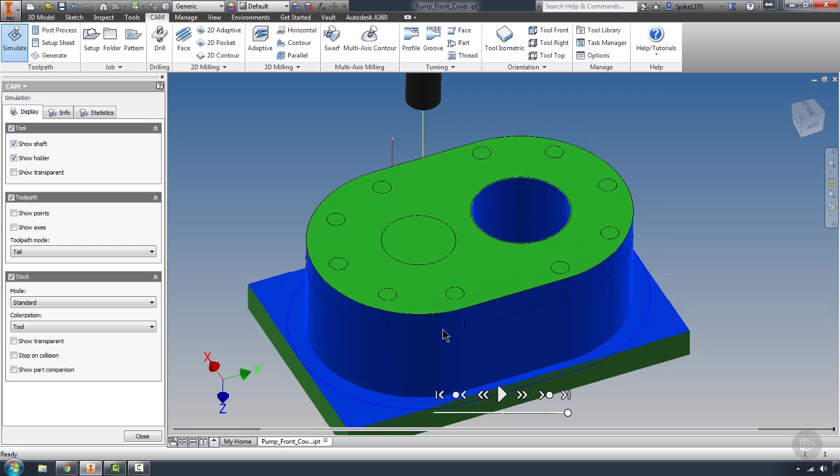So I know that these three toolpaths are checking out. So I want to continue to rough this part out. I'm going to need to rough this particular bore out still. So I'm going to continue using this create a derived operation, 2D milling. And instead of contour to rough that out, I'm going to go ahead and use a boring operation.

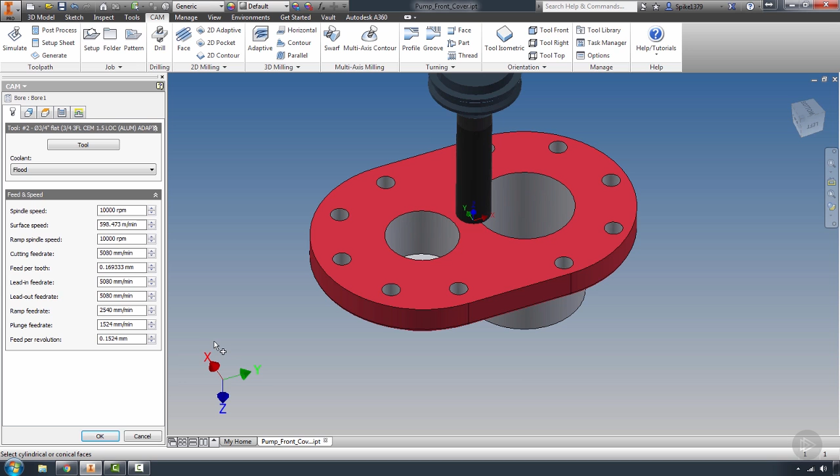Now this is a helix bore operation, so it's asking me for cylindrical geometry. Now the cool thing about HSM is that it's picking up the entire cylinder, and I have the option to change the height. Again, this is going to the model bottom that was selected to it, but I have the option to select the whole bottom. Now that automatically selects the end geometry of any cylindrical geometric shape. So therefore I am automatically moving to that location, but it's 0.05 millimeters past, so I'm going to change that to 0. Go into my passes tab and look at my technology for a moment.

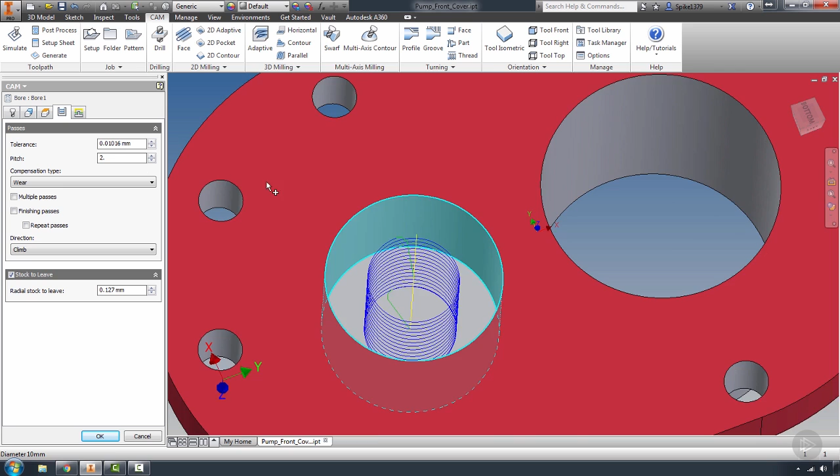You can see things have changed. I have the ability to use multiple passes if I need to. In this case, this hole is big enough or small enough for the cutter to where I don't need to do that. I have my pitch control, important to know, so I can change this to be 1 millimeter, or even in this case for aluminum, I can go much bigger than that. I control the value of my helix. And then I can add a finish pass.

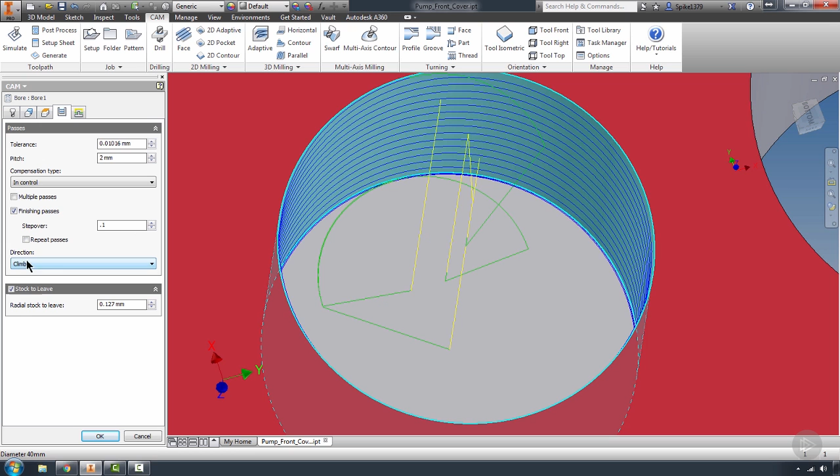Now the finish pass is going to be a circular pass with a lead in, lead out, to engage cutter compensation, and allow me to use G41, G42 again. This is the finish allowance of the actual step over the finish. We'll go 0.1 millimeters for that. And we'll have 0 stock to leave because we're going to actually machine that bore all the way down. That's a clearance bore, so this should actually be the perfect toolpath for it.

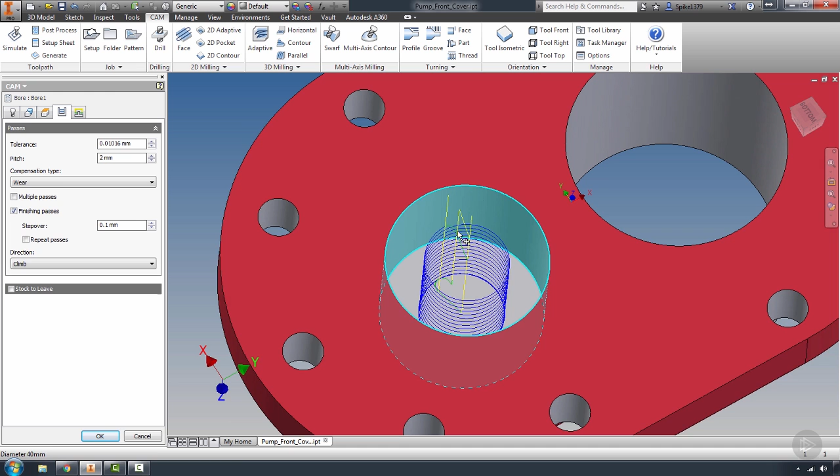And just like that, I've got the proper toolpath. Now you'll see there's something wrong with it. I may have actually accidentally selected the wrong compensation value. And there we go. We'll switch that over, and you'll see that now that's accurately represented to the tool radius. Hit OK. That bore is completed.

And now I need to do just a finish toolpath within this cylinder. Now, I would normally, in most CAM systems, use a contour to come in and just finish this bore. But what I would like to do is actually right-click, create a derived operation, a 2D milling operation, and use a circular cutting operation. Now I'm going to come over here to the panel real quick and show you down in the drop down menu where this toolpath is, and as I hover over it you'll see that this is for circular milling.

Now the important thing to recognize with this is it's set up in the post processor to actually create full or separated arcs based upon your machine tool's individual needs in the post processor. This is going to be different from what your machine output's going to do with contours. So it's important to understand that contour shapes are good for just about everything. But when you want a true circle and to create true circular G-code, use a circular toolpath.

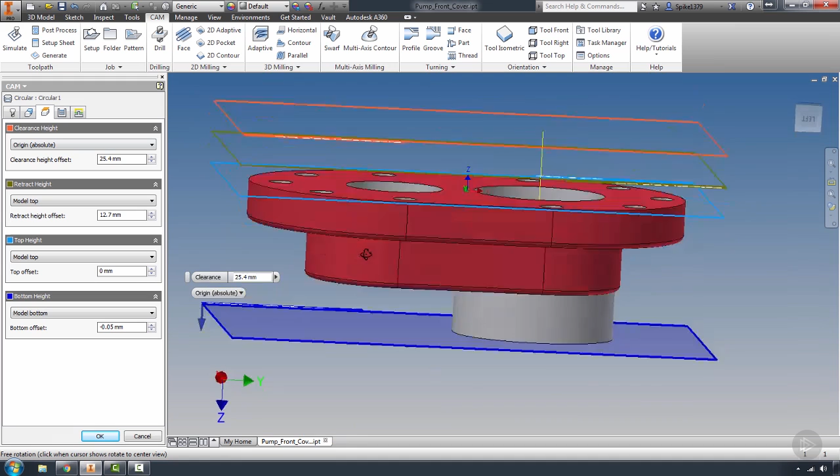So we're in our circular toolpath now. I've used a derived operation, so I'm using the same tool. I'm going to select the cylindrical geometry. And you'll see that by default I have this set up for roughing strategy. My heights are going to be controlled by the derived toolpath capability off of that contour. Inside of my technology and my passes tab is where I'm going to change the multiple depths. So I'm going to turn that off. I'm going to just have the individual lead in, lead out, the individual single toolpath at the very bottom.

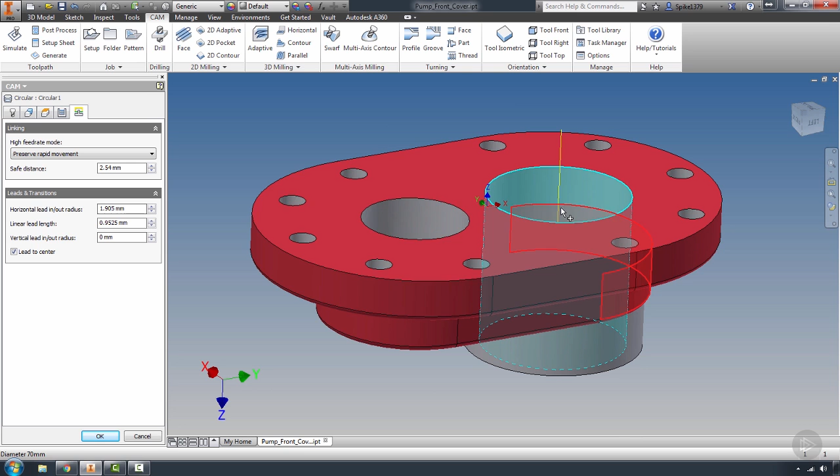Now in my linking toolpath, I always have lead in, lead out to center selected. This is a personal preference, as I like to see in the G-code before it goes into the hole that it has reached the actual center of the hole before creating the contour. So if I turn this off, you'll see that it will lead in, lead out close to the wall and save some time. For me, when I'm machining most things as a prototype, I like to be able to look up at that position and know that I'm relative from my coordinate system to the starting point of the center of the hole. It's just an extra added check for me. I'm going to hit OK. That's going to finish that bore.

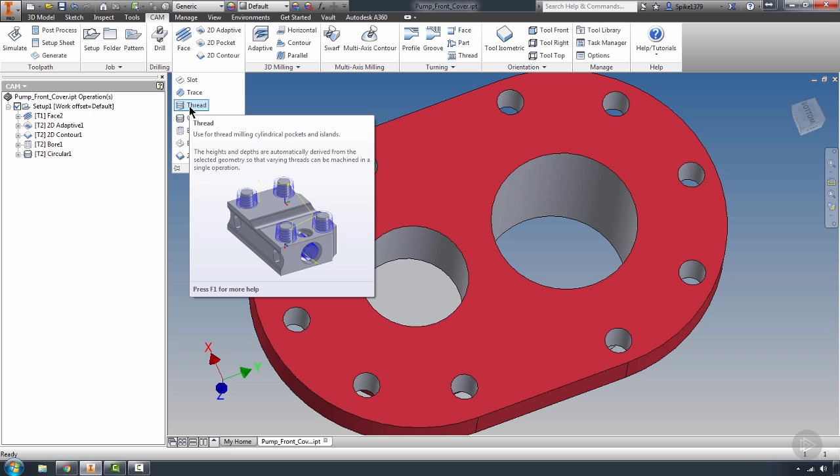Now this is a thread. So while I've finished the ID profile of that thread, let's go ahead and look at our next toolpath, which is actually going to be a thread toolpath. So in threading, this is a thread mill toolpath, and it can do both internal and external bores. I'm going to left click on it.

Now we have the toolpath dialog pop up again, and we're going to go ahead and go into a library. Now I'm going to look up a thread mill. So I'm going to go by toolpath type, by tool type. I'm going to left click on thread mill. So I don't have any libraries with any thread mills defined, so I'm going to actually have to make a

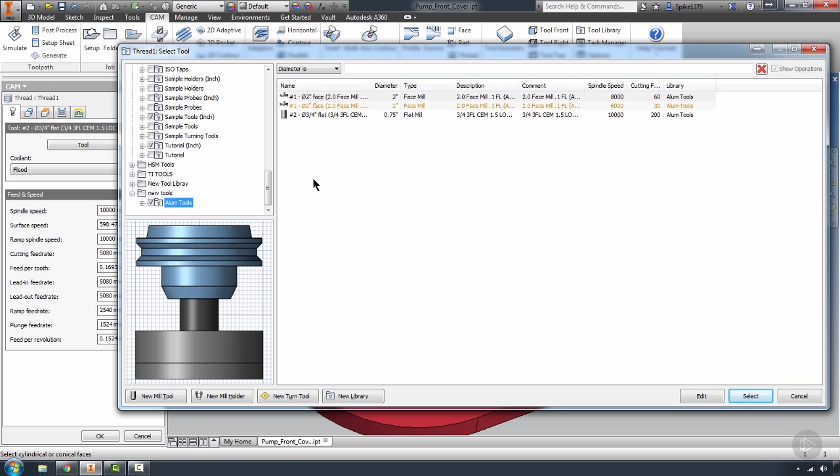new toolpath. So I'm going to hover over my toolpath library in this instance. I'm going to make it directly in the library. Go into a new milling toolpath, left click on my cutter type within the general tab, and you'll notice that there is no thread mill option. What I'm actually going to use is a form mill.

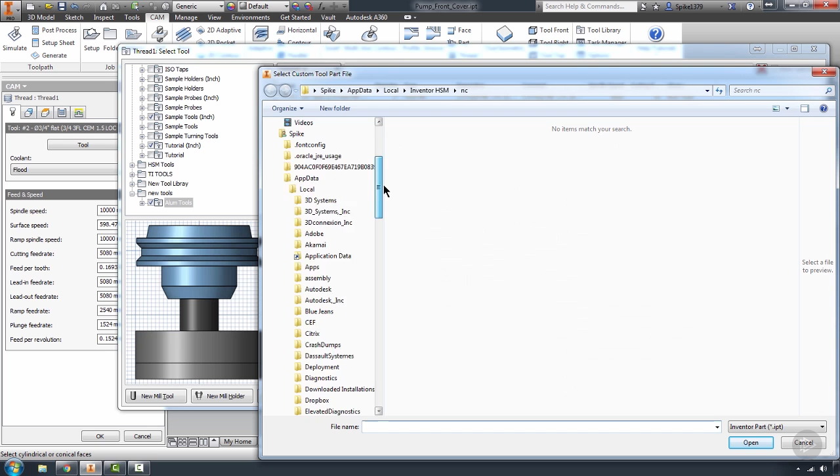Now I already have the geometry of my particular thread mill that I like to use created externally. So I'm going to import that geometry. That's simply navigating to wherever that solid file is created. And I'm just going to simply left click on that solid, and it's going to open and import that solid profile. So now I have my 60-degree single point thread mill cutter defined.

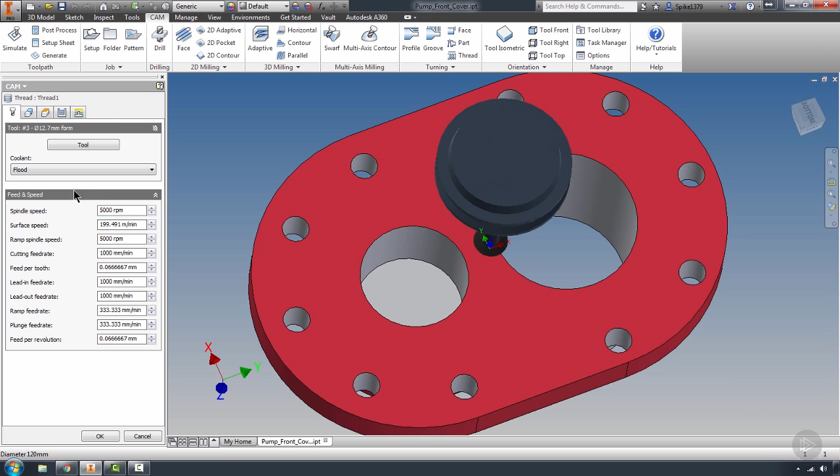I'm going to select OK. Again, I could go through and name it. In this case, I'm going to skip that in the savings of time here. I'm going to select that tool. You'll see graphically I have a representation of that tool here. Speeds and feeds automatically populated. I'm not going to worry about that for now. And this is where I select the geometry next, which is going to be that face.

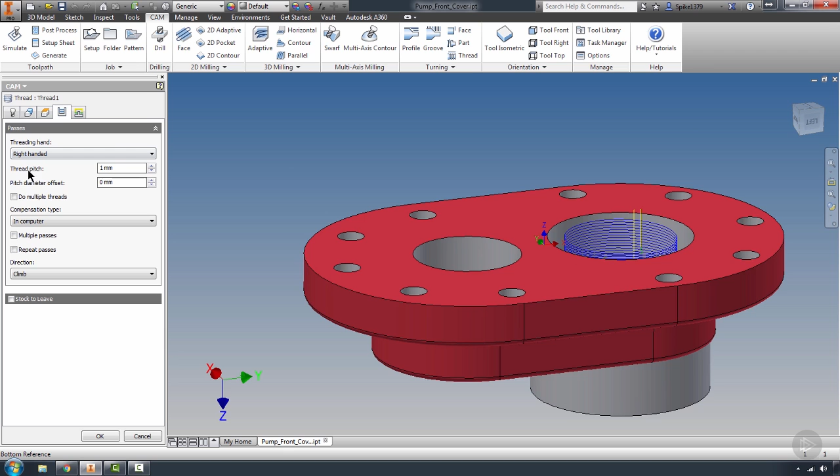Now whatever the default settings are set up to is what it's going to automatically go to here. So I'm going to go to my heights tab. Everything should be set from hole top and hole bottom, which is going to pick up that cylindrical geometry there again. And in my passes tab, I'm going to control what my pitch is. Now in this case, this is an M56 by 2mm thread. So we're going to change our pitch to 2 millimeters.

The diameter offset is created if there is a difference in the geometry selected. So if the major diameter is not represented and it is represented by the minor diameter, you may need to change this offset value to create the difference between the hole diameter and the actual major diameter of your thread. We'll change our compensation to wear, because naturally every time you thread mill, you're going to have to actually comp it out to make a good thread.

My linking tabs, I'm going to go ahead and leave everything default, but you can see that I have the normal selections here, and the one that I'm going to change is the vertical lead in and then out to 0. I'm going to hit OK.

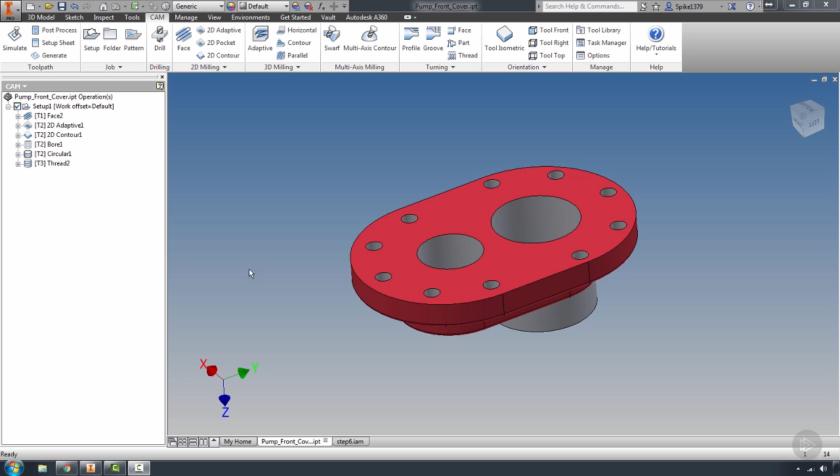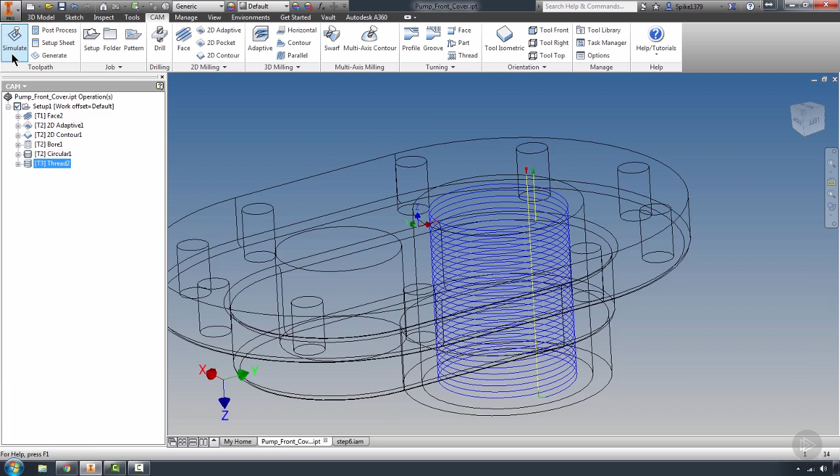Now with the toolpath complete, I want to go ahead and verify that toolpath so that I can see the actual threads. Now what I want to do in this case, I want to see the threads as I cut them. So I'm going to come down to our visual styles on our right hand side menu bar here, and I'm going to change it from shaded with edges to wireframe so that now I can see through that part, highlight just that toolpath and simulate it. Now I'm going to turn off stock for this first simulation.

I'm going to put it to the left view so that I can see this side edge of my hole. And now I can run the simulation of that part, and I can actually see the engagement as I'm off to the side to see whether or not it's going to create the correct thread on that diameter, as well as tracking and navigating the pitch.

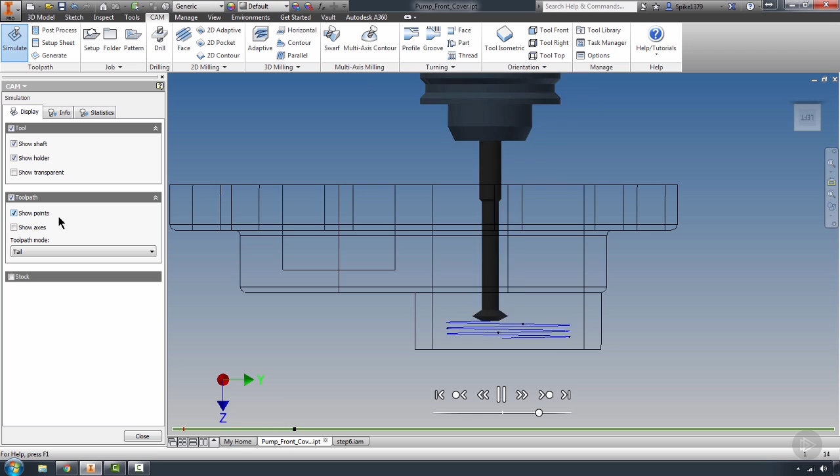Now I've clicked on show points, and the reason for that is that you can actually come to the furthest point at any point in time in the code. You can click on any point to see where that is with any cutter, and I can see from here that I'm engaged into that wall.

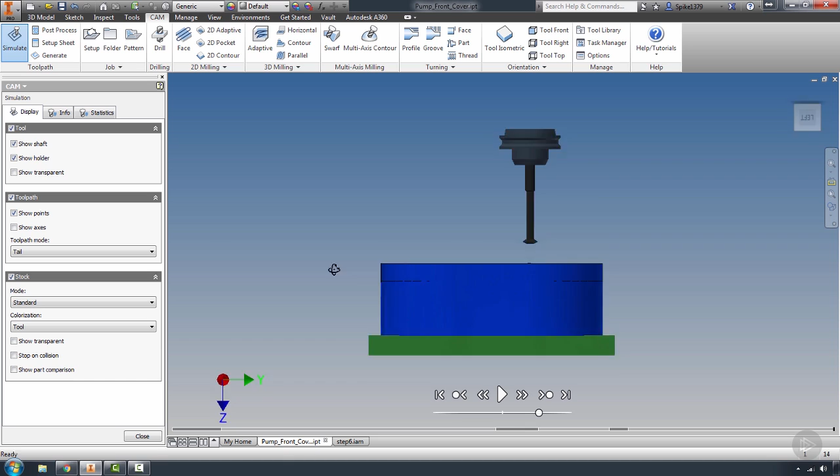So now what I'm going to do, just to double check and make sure, I'm going to verify all of the toolpaths, and I'm going to show stock. Now what I should see in the stock now is that I have a full cut thread all the way down into my stock. Now you would notice that I have the part set to machine from the bottom up.

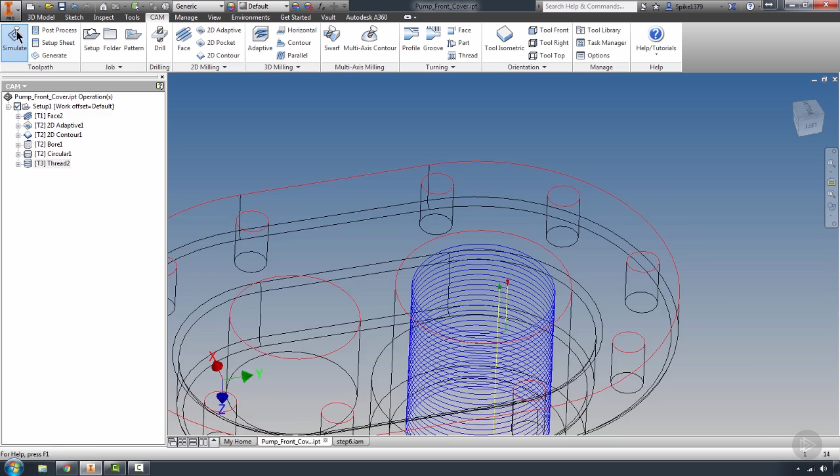There again, there is an option in here to machine from the bottom up or the top down, and that can just be changed by simply changing the direction from climb to conventional. Now that that's set to conventional, that's actually going to conventional cut from the top down direction. And as I simulate that, I'll turn the stock off and push play, and you can see now I'm going from the top down.